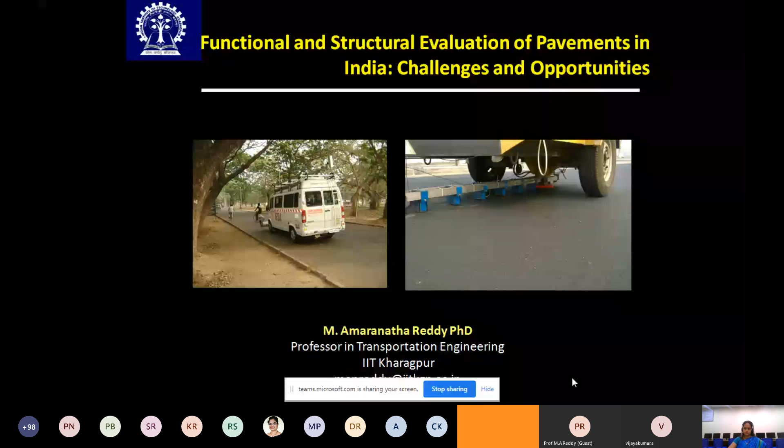My topic is on functional and structural evaluation of pavements. Let us understand what functional evaluation means. Functional means it is something to do with the top or surface layer of the pavement, that is the various characteristics or parameters. I'll come to why these are important later. The second one is structural, which means load carrying capacity or load transferring characteristics or parameters. So these two are important.

Apart from building good quality roads, the first aspect is very much demanding for the users, and the second one is for the designers or the people who maintain the infrastructure.

For civil engineering structures, be it any building or historical monuments, bridges, dams, steel structures, roads, even quality assessment of concrete or water tanks, assessment is very much essential. Once we build a building or construct a dam, we need to know the current status of that particular structure, in terms of functional and structural aspects.

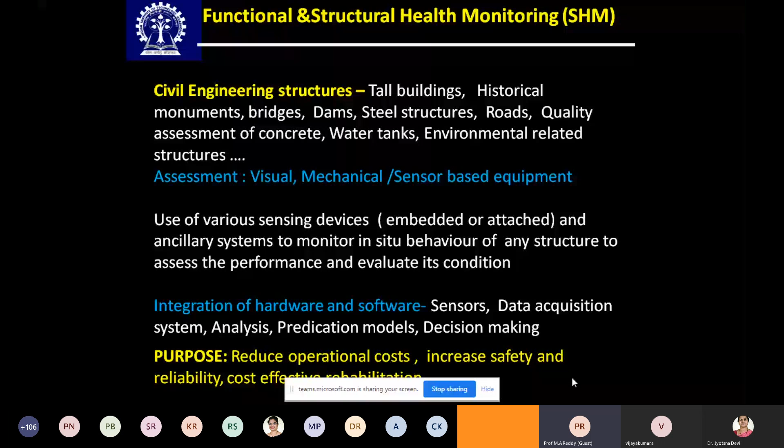Now I'll switch to my topic, which is pavements. Health monitoring of pavements is very much essential. Compared to any other structure, pavements will deteriorate very fast.

If the traffic is very high, meaning if there is overloading, and what you have projected and what is actual are different, things will deteriorate faster. Climatic conditions, rainfall, heat - all these things which you cannot avoid will also contribute to deterioration. Even a pavement that is constructed and left with no traffic on it is also going to deteriorate, only the rate of deterioration will not be as fast compared to pavements subjected to traffic. So all pavements deteriorate over time.

So you need to know the current status of these pavements. Of course, somebody can say there are visible cracks - but cracks means what kind of level of cracks? It's subjective. With these cracks, what kind of riding quality do you get, and what kind of vehicle operation cost is going to result? You can see the cracks, undoubtedly, and cracks do indicate deterioration, no doubt.

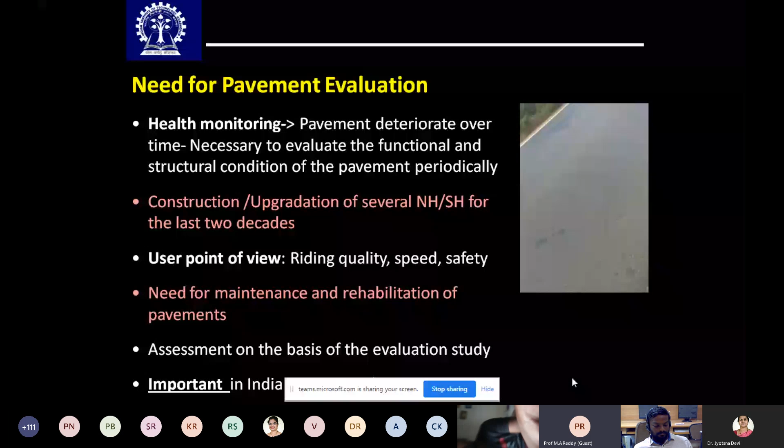For example, if I just open any NHAI website - NHAI is responsible for developing the road infrastructure in India, under the umbrella of the Ministry of Road Transport and Highways - you can see that when you want to rehabilitate the existing pavement, that means you want to go for rehabilitation, that means improving, upgradation.

They always say that you have to do this kind of things. You can see that a lot of facilities are required. I'll just come to this. So even, for example, one of the surface characteristics, undulation, is nothing but roughness. I'll come to definitions a little bit later.

See, for example, roughness has to be carried out using a network survey vehicle, which has got laser profilometers. So when I want to do the functional evaluation, roughness is one of the important parameters, so I need a network survey vehicle which has got a facility of laser profilometer.

Similarly, when I come to the strength point of view, strength characteristics of an existing pavement - since I already constructed it 5 years ago - now whether it can structurally take the load, whether it has got load carrying capacity, or whether the life of the pavement has come to an end. How to know that? For that also you need to do some kind of evaluation, which is non-destructive evaluation, NDT, using an equipment called FWD. Anyway, I'll come to this a little bit later.

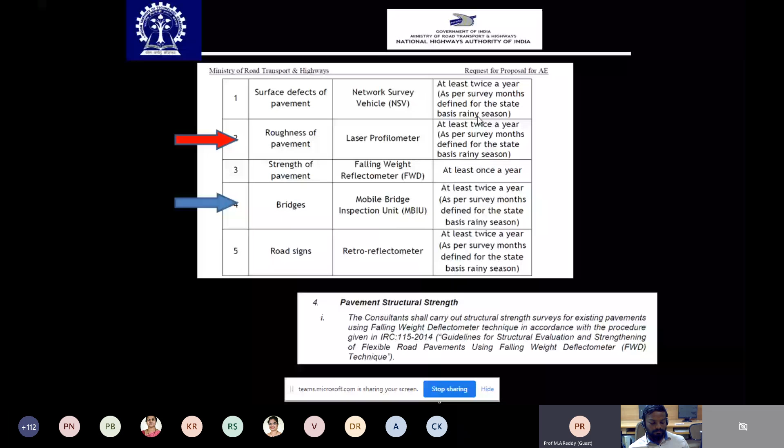Okay, so now with this background, I'll just come to this - functional. What do you mean exactly by functional performance and structural performance?

Functional performance means the ability of the pavement to provide a comfortable, safe, economical riding surface to the users. This is related to the top surface of the pavement, which we call the wearing course.

So how do you measure this functional performance? There are a lot of indices available. One is called Present Serviceability Index, PSI, and another is Present Serviceability Rating, PSR, where I can rate the pavement between 0 to 5 on a scale. I can also evaluate it by skid resistance, how much skid friction is being offered.

I can also evaluate in terms of roughness, that means the undulations of a pavement structure which is there.

So PSI and PSR are terms given by AASHO, one of the first ever road test facilities, created in the US. They constructed several pavement sections in the US back in the 1950s after the Second World War, because all the pavements were badly damaged. They wanted to understand material behavior for different loads and climatic conditions. So they constructed several sections, and a lot of studies were done. That was a landmark for the development of pavement engineering.

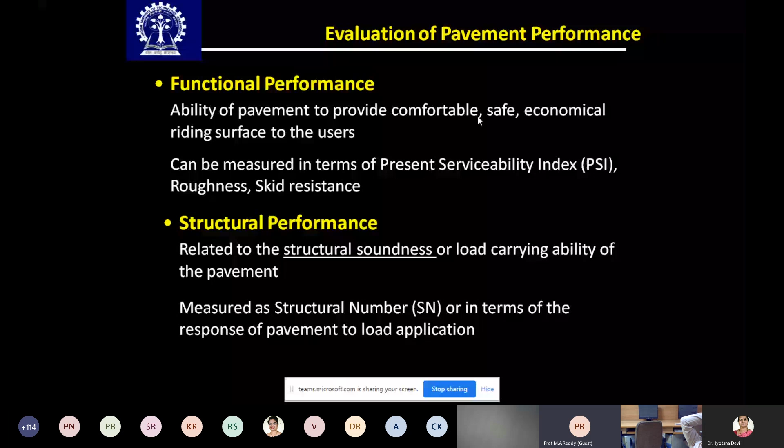Now, the most important parameter in functional aspects is roughness. Road roughness is the cumulative vertical undulations, expressed in terms of some kind of convenient index, a value that reflects the user's response. A person is going to experience this roughness.

Suppose the road has low or no roughness - of course it's impossible to construct a road without any roughness, but it will have some. Finally, the user gives his response for a given road while traveling under standard conditions, at a certain speed, since it's a function of speed also. So roughness is nothing but a measure of the variation of the surface profile of a road, and the surface defects or diseases that influence riding comfort.

So how do we measure this roughness? This is one of the very important applications in pavement engineering. Normally in India, we measure this using an equipment called the bump integrator. There are a lot of other methods too, which I can show you later. This is a vast subject that has already been developed, and I'll tell you what we can do here.

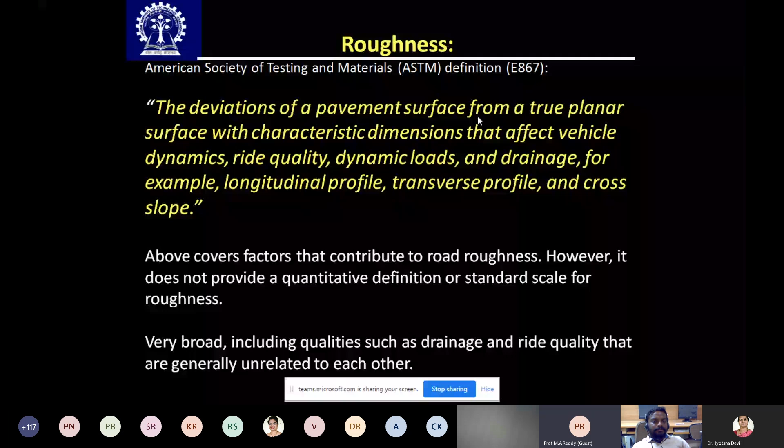Now, roughness, as I said, is to be defined over an interval of a profile. That means roughness can be per kilometer, per 100 kilometers, per 100 meters, 10 centimeters, or even 2 centimeters. So that makes a difference.

So it's nothing but a summary of deviations that occur over an interval between two points. The two points can be, as I said, 1 kilometer, 100 meters, 10 kilometers, or even 10 centimeters apart. Thereby, the roughness values I am going to give you are not unique.

Not all types of roughness are unique, because if I measure with one instrument at different periods, I may get different values. If I use different instruments, the reference points and the interval between two points will vary. I'll show you later on.

Some instruments measure roughness at 250 meter intervals. Some measure at 400 meters. Some measure at 10 centimeter intervals, like two reference points, one at 0, another at 10 centimeters, then 20 centimeters, 30 centimeters. So this will make the roughness values different.

So many of the roughness indices calculated from profiles are so strongly correlated that one is statistically sufficient. Statistics comes into picture when giving roughness values, because of these deviations. So finally the roughness indices are calculated based on some kind of simple statistical work.

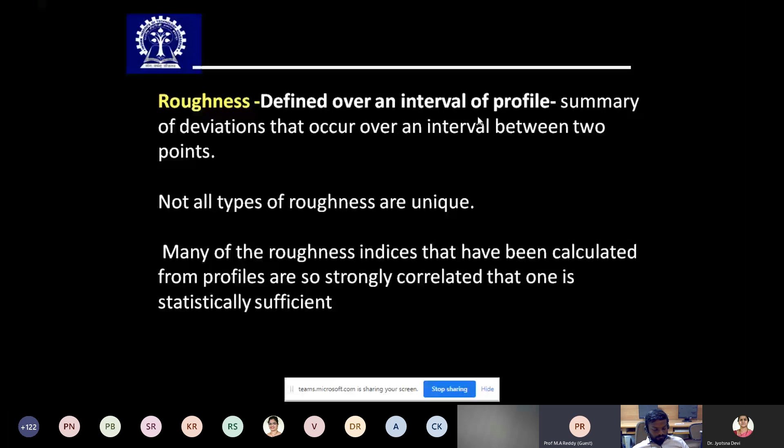Overall, roughness measuring devices are plenty. They have been classified into 4 groups: class 1, class 2, class 3, and class 4. Class 1 are precision profilers, like laser profilers, non-contact, lightweight profiling devices. I'll show you some of them.

You have hundreds of reference devices available. Each country and each university, in some cases, have developed their own roughness device. Because you can measure this roughness with reference to a true planar surface, you can develop any kind of instrument.

Finally, of course, you can convert them into one unit. For example, that's what International Roughness Index means - all the roughness equipment you have developed can be converted into IRI values. I'll come to that later.

So you have class 2, class 3, and class 4. Class 4 are just rating systems, visual inspection, rod and level survey - these are very simple things, very subjective in nature. But when you go from class 4 to class 1, class 1 is very professional, precision profilers.

We can see what is currently used in India. One instrument in class 3 is called Merlin. This is a very simple instrument that one can try even at the college level. Merlin is very cost effective, though it has its own advantages and disadvantages - a very simple, low cost roughness measuring device.

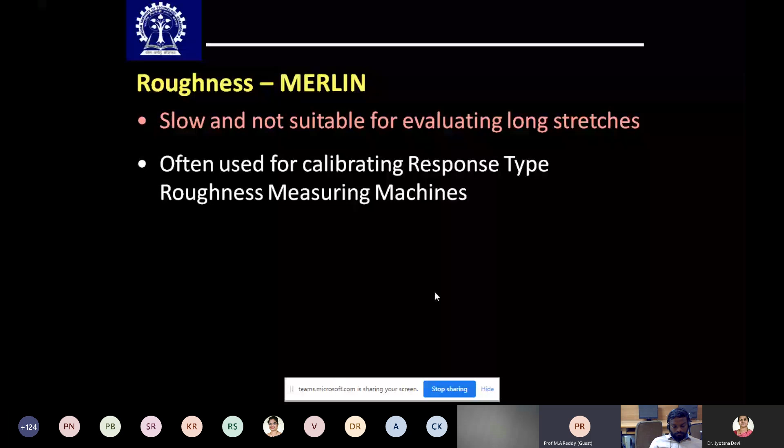They are of a type called response type. Response type devices are, for example, the roughometer.

You can see that roughometer. This Merlin can be used to calibrate some roughometers, like the TRL bump integrators. These can be calibrated using a Merlin, as per the Indian Roads Congress IRC, which is the guideline we normally follow for measuring roughness.

They also said you need to calibrate the fast moving devices, the bump integrators, with Merlin. So with the Merlin, we measure a profile. It has 2 legs, called reference points, with a distance of 1.8 meters between them, and a probe. This probe measures the profile of the pavement when I place it here.

With reference to this imaginary line joining foot 1 and foot 2, which are the reference points, we measure how much the pavement is deviating with respect to this imaginary line. That is called mid-chord deviation. This is not yet the roughness.

When I move to the next point, maybe another 1.8 meters, I'll place the probe there too, and I can find out the mid-chord deviation. Suppose there's no deviation - if the pavement profile truly lies on the imaginary line, then there is no mid-chord deviation.

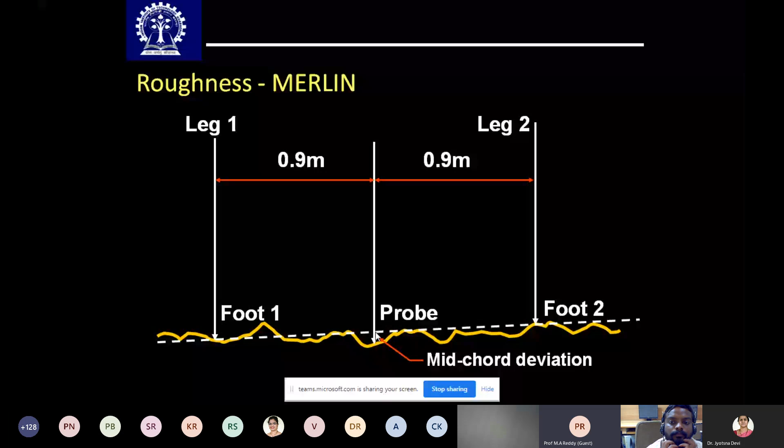This is the figure - you have the front leg, the rear leg, and a probe. This probe is connected to a moving arm with a pointer. You place a graph sheet, and the deviation is reflected here - wherever the point is shown, you mark it. You continue measuring this roughness multiple times statistically. They say you have to measure 200 points in a given pavement.

This Merlin uses a cycle tire, and one can fabricate it very easily in college - very simple, and of course a manual is available. This was developed by TRRL, the Transport and Road Research Laboratory, in the UK, a long time back, and we still use it.

You can see this is the probe - though I don't have the full figure here. This is the probe, this is the moving arm, and there is an indicator here. The indicator shows the deviation. Normally you have to take 200 points.

This 200 points - let's say this is the graph sheet. When I place this on the pavement, normally we measure as the wheels move. If I place this, and the probe is let's say here, correspondingly the indicator shows the point here. So you mark a point here.

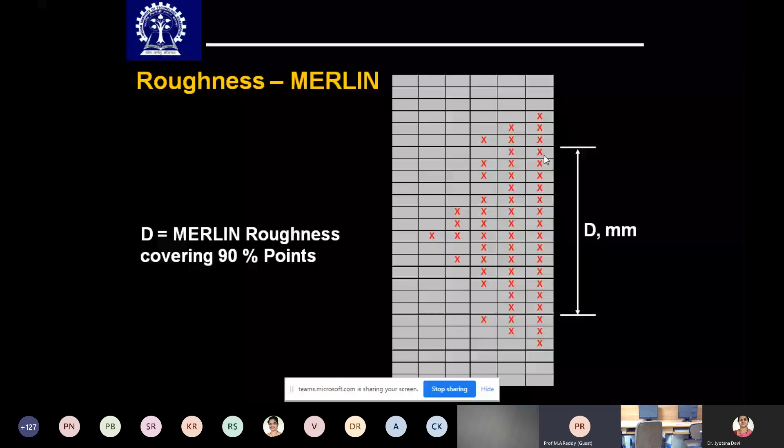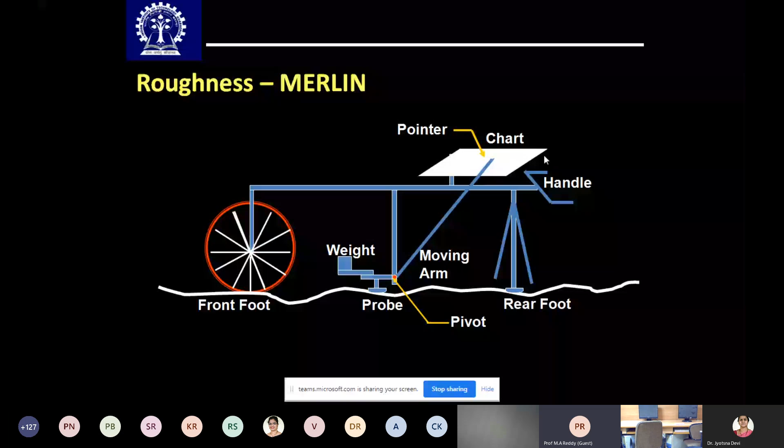If you can convert this into other indices, as I said, a lot of equipment is available. You can see in this equipment list you have Merlin. I can convert this Merlin value into a bump integrator value, and I can also convert this Merlin into IRI, that is International Roughness Index.

For that, they have given equations depending on the type of pavement surface. For example, if it is a national highway, Indian national highways have an asphaltic concrete surface, and D is the dispersion from Merlin. So if I have D, I can get a bump integrator value. That means as if I don't have bump integrator equipment, using this dispersion D measured from Merlin, I can convert into BI.

Similarly, if I want to express it in International Roughness Index value, IRI, knowing D from the dispersion of Merlin, I can calculate it from these equations, and represent the roughness in terms of IRI, where the units of IRI are meters per kilometer, whereas BI is mm per kilometer, and D is the Merlin value in mm. So calibration equations like this are available.

For different pavements, mostly for BI, because BI is another instrument, the bump integrator, that gives the roughness index from bump integrator value, a lot of work has been done, and they have given correlations between BI and Merlin, and similarly IRI and Merlin.

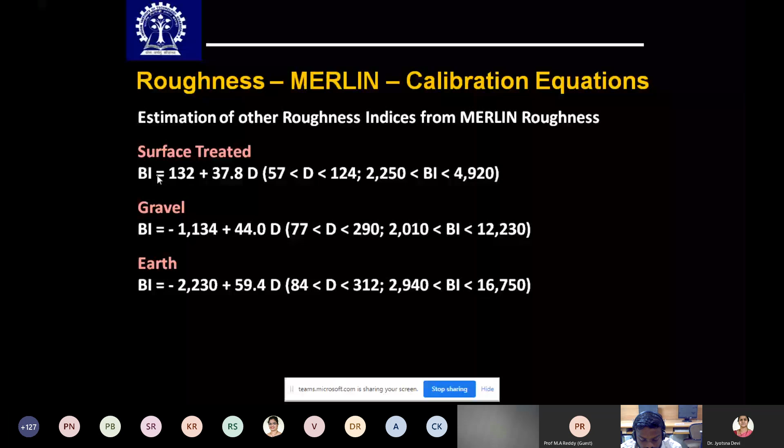The next instrument which is very much available is the fifth wheel bump integrator, which is also called a response type roughness measuring meter, RTRMM. Compared to Merlin, this is a fast moving device for measuring roughness. Normally in India we use this kind of instrument called the bump integrator, or fifth wheel bump integrator. The reason is there are four wheels required to drive and pull this at a constant speed of 32 kilometers per hour. So this is a response type device.

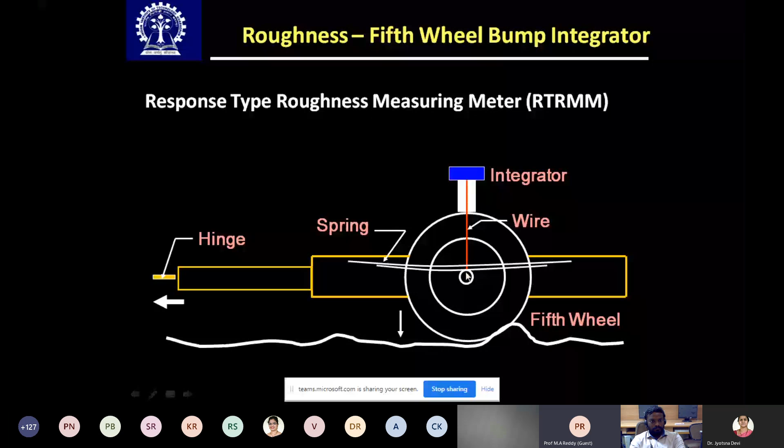What is there in it? You have a big chassis, a wheel, and an axle. What they do is mount a small device on the axle, which I'll show you in the other figures.

Whenever this wheel is driven at 32 kilometers per hour, the vertical movement of a suspension system of the roughness meter is measured and accumulated with the distance traveled. When there is a pavement undulation, like a depression, the wheel will go down, but the chassis with the entire assembly, around 900 kilos, heavy weight, will not move simultaneously because of inertia. So there is a lag.

During this lag, this is pulled down because there's a wire connected here. So when the wheel goes down, the wire also pulls, and this movement is recorded in centimeters. Whenever it goes down by 1 centimeter, there is 1 revolution of an attachment inside, and that 1 centimeter is recorded by a recorder. Suppose the undulation is 5 centimeters down, then it is pulled to 5 centimeters, and that is reflected in the counter. So taking advantage of inertia, the vertical movement is counted in multiples of a specified vertical distance, maybe 1 inch, or even 1 centimeter if required.

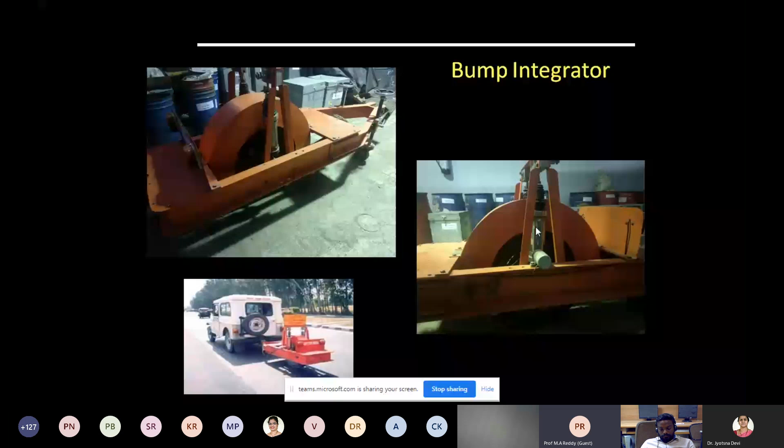So this kind of instrument requires calibration regularly. Otherwise, if it becomes very stiff, the response that's supposed to give the vertical movement may not give what it was supposed to. So you need to calibrate these bump integrators regularly, otherwise you may get a value, but it may not be the correct value. So how to calibrate that? There's a procedure available.

What you have to do is run Merlin and bump integrator on at least 10 sections. You get these 10 points and then develop a correlation based on the surface. For example, if I want to do it on a national highway, I should select 10 points on a national highway, run the bump integrator, and also run Merlin on that, so I have 10 Merlin points and 10 BI points.

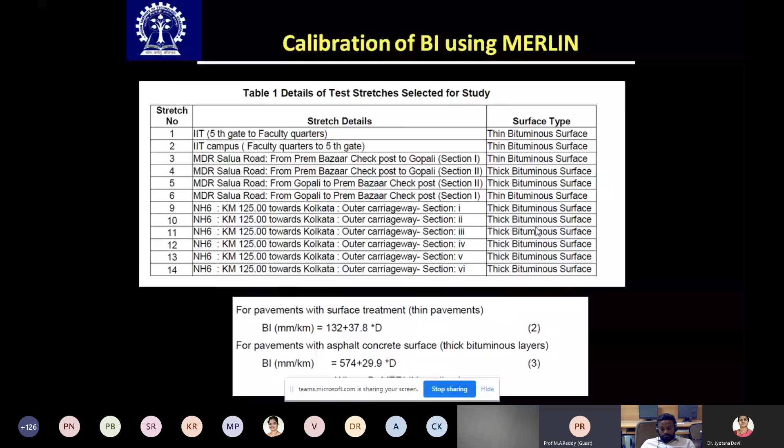If my bump integrator is correct and not deviated - the oil is in good condition, the springs are also in the condition they're supposed to be - then if I get a correlation for a national highway, I should get the same correlation as given after calibration. Suppose I have 10 points of D and 10 points of BI.

I plot a relation. If I get this kind of correlation, then I can say that it is perfectly all right.

Suppose the calibration gives a different value, so what do I have to do? I have to correct them. For example, if I substitute D as 100, my BI value should be around 3,473.

But if I'm not getting that kind of correlation, if instead of 3,473 I'm getting BI as 5,000, what does that mean? It means the bump integrator value is giving a higher value than it's supposed to.

So what do I have to do? I have to reduce all my readings by a factor. Similarly, instead of getting 3,473, if I'm getting only 2,000, it means I'm under-reporting my bump integrator value. So I need to multiply by a factor greater than 1, which I should calculate. So calibration is very essential.

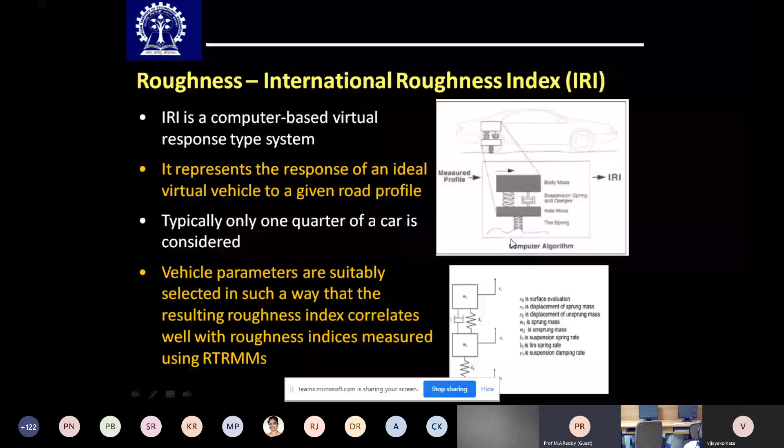What they did was called the quarter car method - a mathematical formulation. The spring and dashpot, the vehicle suspension, body of the vehicle and tire - everything is simulated through a mathematical expression. They have given a mathematical expression, and I can show you that.

So this is a way in which they try to simulate the vehicle response as if it is moving on a road at 80 kilometers per hour. They calculate this from measured data, acceleration of the mass of the vehicle, and all this information. Then they pre-process it and integrate the acceleration data using mathematical expressions. Finally, you get an IRI value. There's no instrument available for IRI directly, it's a mathematical simulation which depicts the vertical undulations or vertical response of a vehicle moving at 80 kilometers per hour.

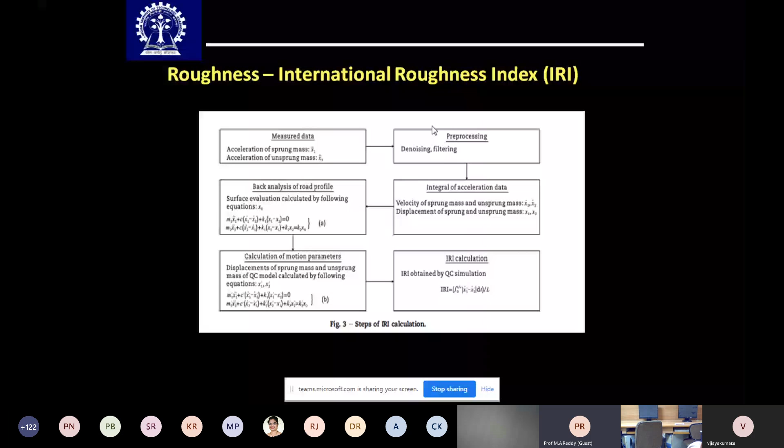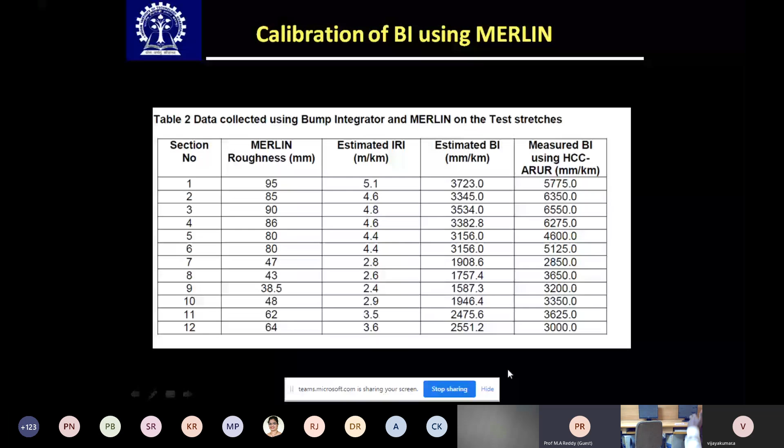With IRI, there are some correlations available. For example, if I measure roughness using Merlin, I can convert it into an IRI value. Similarly, if I measure roughness using a bump integrator, I can also convert that into IRI. So IRI is a universally accepted unit, a computer simulated mathematical model, for easy understanding. Suppose I say my roughness is 5 meters per kilometer, the international community will understand the roughness of a pavement. For example, 1 means very low roughness, 5 means very high roughness. That is what we were using until recently.

But now, with the investment being poured into Indian highways, authorities like NHAI and other organizations have started asking for even higher precision type profilometers. If you see the list of roughness measuring devices, you have class 1 laser profilers. What we have discussed till now is only class 3, the bump integrator and Merlin. But in recent times, because of advancement in technology and the importance of the project and precision required, the government is now asking for laser profilers also.

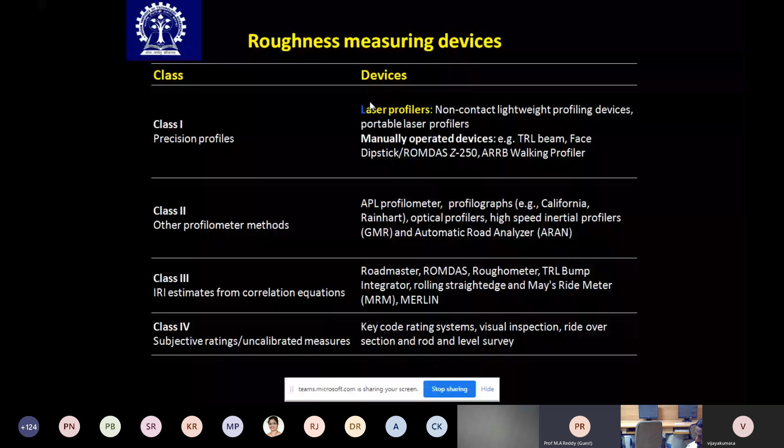So one of the laser profilers, what is this? It is nothing but a combination of a laser and accelerometer sensors to measure the road profile at highway speeds. So that means you have a vehicle with lasers and also accelerometer sensors. These accelerometer sensors, in combination with the non-contacting lasers, will give you the vertical undulations, cumulative vertical undulations.

This is also now integrated with GPS, so you can get the distances traveled. You can see this is a height sensor, and you also have an accelerometer. The height sensor picks up the height; suppose the vehicle is moving, the height is varying, so that height variation is picked up by the height sensor, and further captured through the accelerometer, and finally recorded in the computer. So this kind of device has come up in recent times, these are called laser profilers.

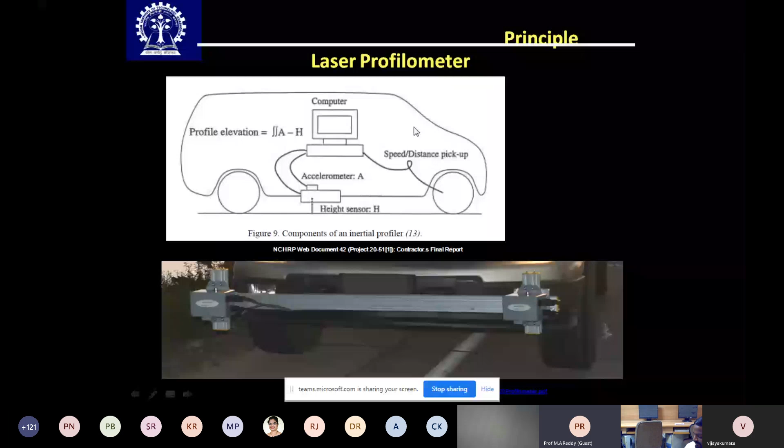One of the equipment which the Government of India is now telling us to use is the network survey vehicle. In the first slide also I showed that roughness has to be measured through a network survey vehicle. This kind of vehicle has been available in India since 2005. One such vehicle came to our campus sometime back, and we could see a demonstration of it. This is called a network survey vehicle, and now a lot of network survey vehicles are available.

Network survey, what is this? It's an instrumented vehicle with cameras all around, connected to GPS, with a lot of sensors and scanners available. It's almost like a scanner, it scans the pavement. Not only does it give the roughness, it also measures the rut depth, which is called permanent deformation. It also scans the pavement to detect other failures like potholes and cracks, everything. Since it's connected to GPS, you can know the coordinates, and the cameras also collect information about roadside inventory, like where is the building, the structure, the bridge, the tree, everything is recorded. Since it's connected to GPS, you can capture a lot of data. So now on the highways, this vehicle also has a laser profiler, which works in combination with sensors and accelerometers.

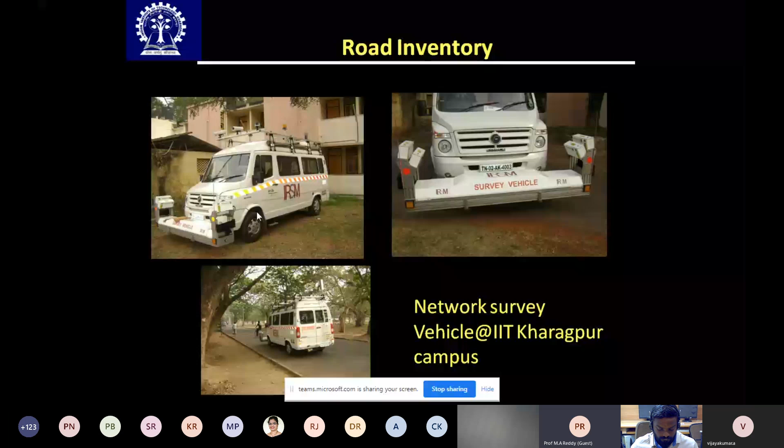Accelerometer sensors are available, laser and accelerometer sensors, so it also gives the road roughness. Today, the raw data is being collected, and there is a software called Data View, used to perform a variety of post processing. For example, if you want to find out the roughness, you can do that. If you want to find out the undulations, the permanent deformation called rutting, you can do that. If you want to know the cracks, you can measure it - crack width, everything, classification of cracks, pothole areas, everything in one go. It's only in one go now, you can record everything.

So this kind of instruments have come up in recent times. Not only have they come up, but people are using them now. Then another important...

application of this functional evaluation is development of a decision tool, which we call HDM4. HDM4 software - HDM4 is nothing but Highway Development Management tool for highways. So what it does, let me give some examples.

If you want to buy a road, suppose a road is being constructed by party X and it is being used for a few years, and party Y wants to buy it. Before buying, he should know what kind of condition that pavement is in, and when the pavement is going to deteriorate beyond a particular level, and what kind of strategy is required. Because he is going to invest millions of rupees on that, and he is going to own it for the next 30 years. He should know what is the condition and how this pavement is going to deteriorate.

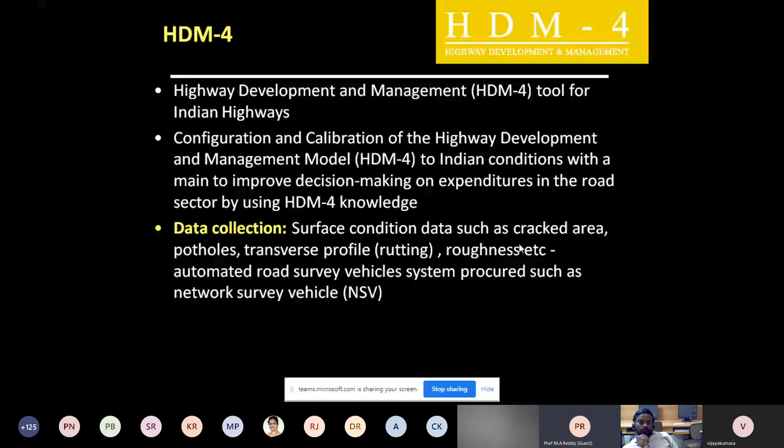So finally, I will conclude this topic. Maybe I don't know how much time I have. A lot of people have developed different profilographs. What I showed you earlier was only two profilographs - one is called Merlin, the other is, of course, the bump integrator. The third one is the network survey vehicle, which has got a laser.

But just see, people have developed several kinds of profilographs - several kinds. As I told you, each university has developed their own profilers. You can see different profilers - lightweight inertial profiler, high speed inertial profiler. Then this is something like the truss-type California profilograph. This was developed at the University of California.

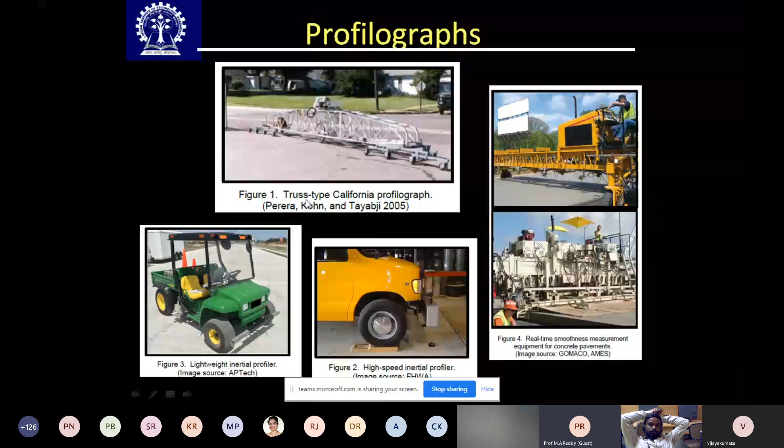Then there's a walking profiler, and the dipstick—everything measures roughness with reference to two points. It's a two-planar system with reference to these two points, and as I told you, these points can be 10 centimeters, 1 meter, 10 meters, or 20 meters apart. Over this length, they find out the elevation of the profile or road profile. A very simple walking profiler may work with maybe two wheels in the front and one wheel behind, maybe hardly 1.5 feet apart. Within this 1.5 feet, the elevation difference will be captured and recorded.

When I was searching, I found somebody trying to come out with roughness measurement based on GPS and accelerometer sensors on a bicycle, mounted using a smartphone. You can integrate a smartphone, which everybody has, on a bicycle. You just require simple accelerometers connected to GPS. A person put an accelerometer on a cycle, and while riding at a constant speed—speed has to be standardized—on a road, he could know what kind of undulations there are, and those undulations get recorded in the smartphone. This kind of work is also possible at a college level.

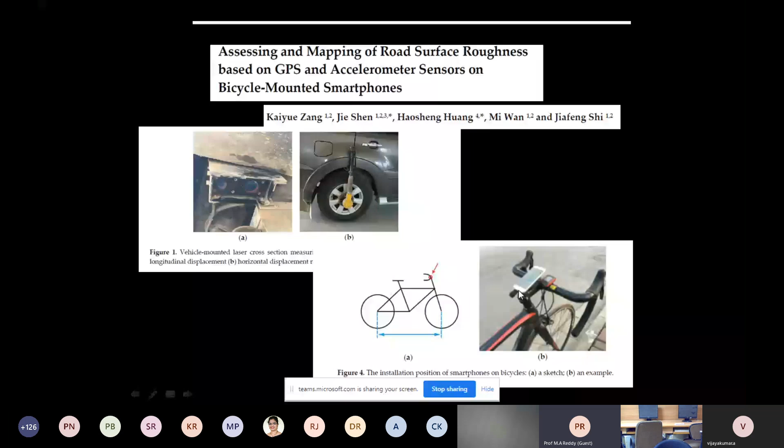He has also defined IRI through this method. Not only that, he developed other tools—since mobile phones can capture pictures and video, you can develop systems to determine how much cracking the pavement has, what is the crack width, where is the pothole, where is the road hump. Everything can be captured through a mobile device. Today this is possible, and it can be done at college level.

Suppose a sensor, when moving over a road hump, gives a different kind of signal. From that it can assess that there is a road hump here, like this. So you can try to identify potholes, humps, and roughness, all by integrating a mobile phone with simple accelerometers. This means when students of different specialties—civil, electrical, electronics, computer science—come together, they can develop this kind of module.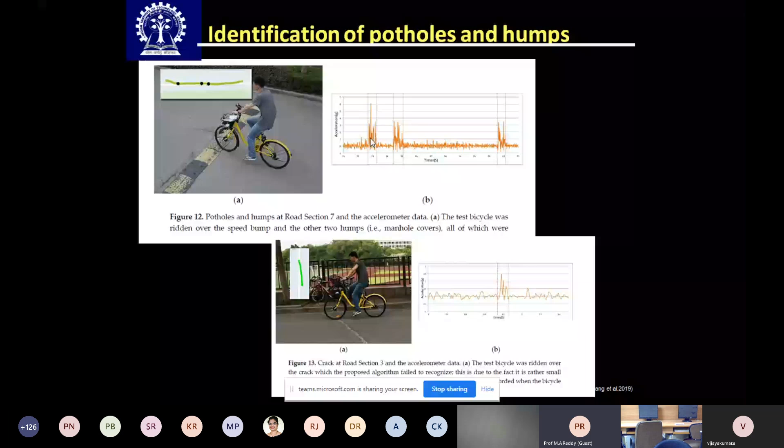Now, what are the challenges for India right now? As I said, you need to calibrate different profilographs. For example, suppose you have developed one profilograph or profilometer—you need to convert its readings by calibrating against other existing devices, and finally convert them into an IRI value. So if you've developed one equipment, you finally have to calibrate it—that's one challenge.

The second thing is you can yourself develop innovative and cost-effective profilers and use them at a regional or national level. At college level you can develop this kind of instrument, showcase it, and start using it to assess road roughness of a particular region, or even go to a national level.

The third challenge: as I showed you with HDM-4, a lot of data is required. The country needs calibration factors for road deterioration, road works, and road user effects for using HDM-4. Right now, for decision making, we are using some default values, but these default calibration factors don't belong to the Indian environment—they have been borrowed, with some assumptions. So somebody can even develop these calibration factors, though a lot of data is required to calibrate them.

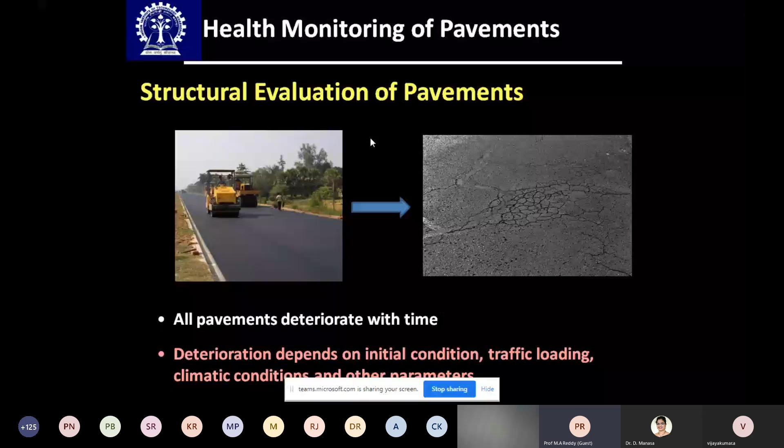The next one is structural evaluation, like the ability of the pavement to take the load. As I said, all pavements deteriorate with time, and this structural health monitoring, in parallel with functional evaluation, started from 1950 onwards. This is nothing but the ability of the pavement to take or carry loads, and it is measured through different terms. As I showed, structural number is one term, or any other parameter.

The load is applied to the pavement and the response is collected. Based on the response, you can know the structural ability of the pavement, like how much load it can carry, or how many wheel repetitions it can carry. This structural health monitoring is required to assess the structural soundness, whether the pavement is sound or not.

Once you know the pavement's health condition, you can estimate how many years it is going to survive, in terms of years, or how many wheel repetitions it can carry. So once I know that it can only take, say, one lakh repetitions, I can immediately plan for rehabilitation, like an overlay. So all these things can be done once I do a structural health monitoring.

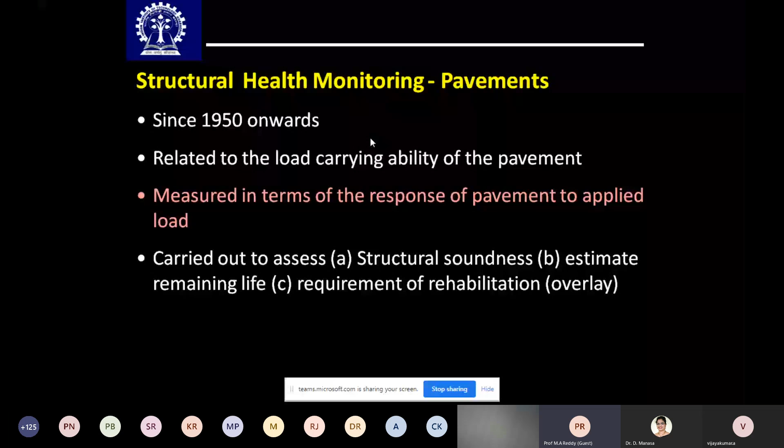So in structural health monitoring, what we use is NDT, non-destructive testing. We drop a load onto the pavement, and once I drop the load, the pavement is going to deflect. Of course, the deflection bowl depends on the characteristics of the material used. Not every pavement has to get this kind of profile, but in general, we get this kind of profile.

So you measure the deflection bowl, meaning you measure the deflections, basically rebound deflection. Once the load is applied and removed, you measure how much it has rebounded. These deflections are different ordinates that you measure. When I apply load, the pavement doesn't just deflect; there are also a lot of stresses which develop, resulting in strains. You can measure any one of them, but measuring stresses and strains is very difficult.

Suppose I want to measure deflection at the interface between two layers—that's very difficult; I'd have to embed some instruments to do that. So out of all this, it is easiest to measure the surface deflection, how much it has rebounded. People have used this data to find the load carrying capacity and a lot of information about the pavement structure, for health monitoring. The health of a pavement can be assessed using this rebound surface deflection.

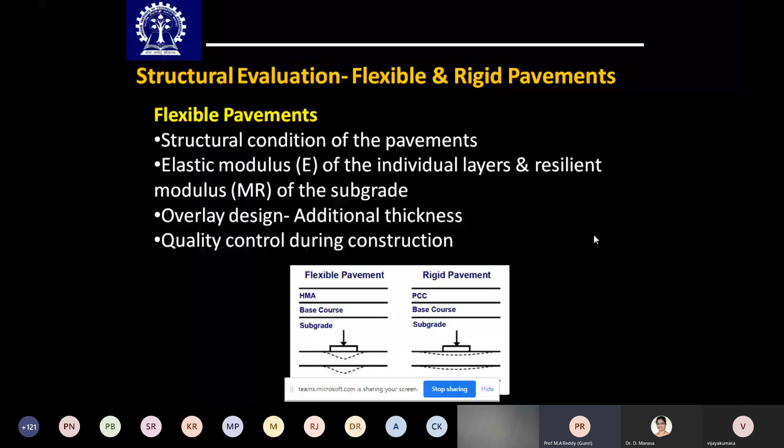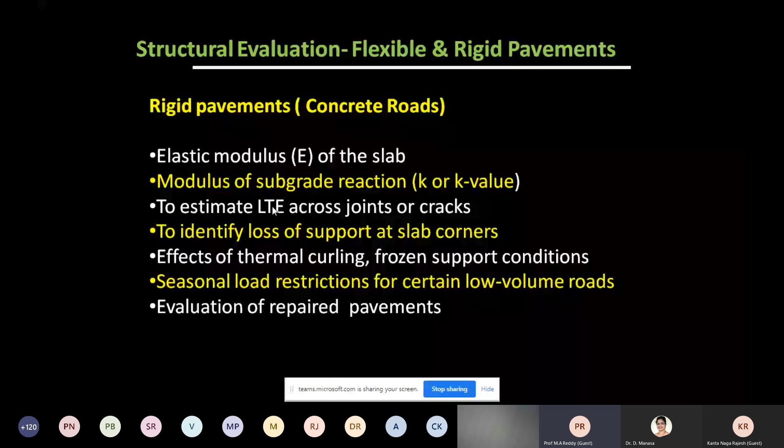All these things can be found out by conducting structural health monitoring for concrete pavements. This developed a lot from 1950 to 2010, as people started developing equipment. They are static load based, vibratory load based, impulse based, and today we have rolling. So there are 4 stages, static to rolling, and where we are standing today is we recently came to this level.

Of course, our country has not seen this kind of instrumentation. We only had static based NDT. Then we moved to impulse based NDT very few years back, almost 3 to 4 years back, and we are yet to move to the other stage.

So what are these? We started with static, where the load is applied statically. Then we moved to impulse, and we have to go to the next level called rolling, where the wheel is moving and we capture how the deflections respond.

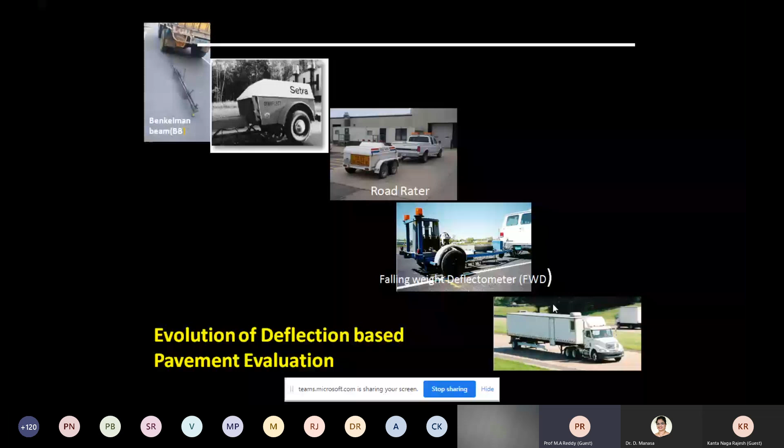Based on this first method, starting from 1950, India also adapted this. There's a guideline developed called Indian Roads Congress 81-1997, where we have a standard procedure to find out the overlay thickness required.

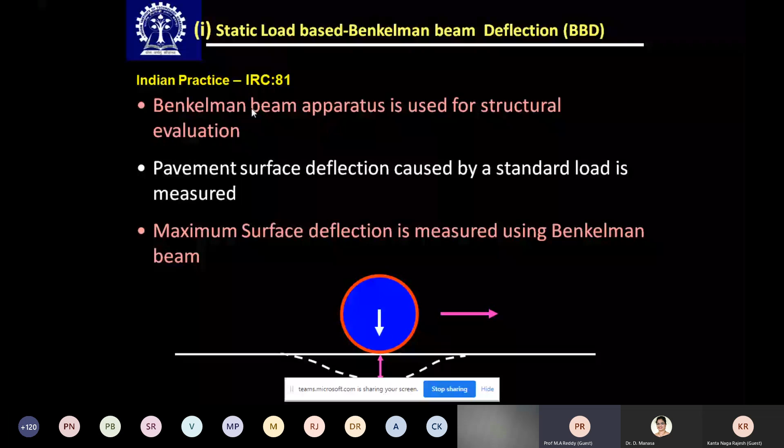So till 2015, 2016, we were only using this kind of method where we have a long beam. There's a method called CGRA method, where we have a long beam and we try to measure only one deflection, the rebound deflection, when the load is removed. So I'll show you a photograph.

So I have a loaded truck here with a standard load of 8 tons on the rear axle. I insert this beam, and then I follow a standard procedure.

So what happens is, when the load is applied, the beam is under the deflected shape because the pavement deflects slightly. When the load is removed, the pavement is going to rebound, and that rebound deflection is measured through a dial gauge.

This is a dial gauge, and there is a standard procedure available for this. You require a simple device called Benkelman beam. Benkelman was the person who developed this, and there is a standard procedure available.

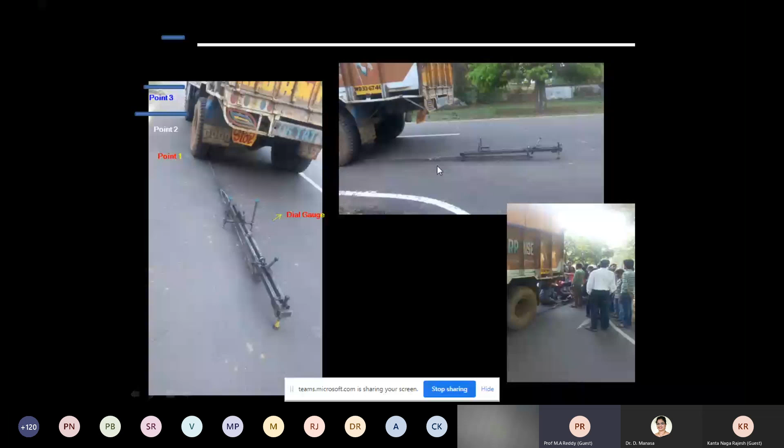With this standard procedure, we have a parameter called characteristic deflection. From this characteristic deflection, I measure what overlay is required. This is a very standard procedure which was there.

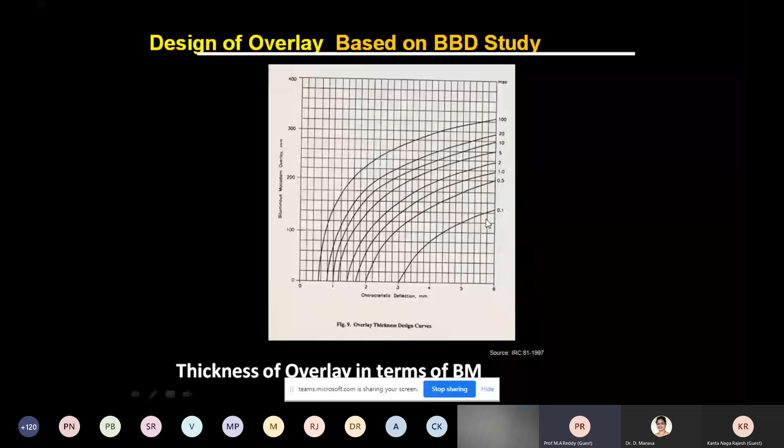But the problem with this is that two pavements, because I am only measuring this rebound deflection, two pavements which have the same maximum ordinate, the same maximum rebound deflection, may have different profiles.

So if you have two different profiles like this, the structural condition of these pavements are entirely different. So this method will not be able to capture the real condition of the pavement with just one deflection value. Moreover, the load is applied statically.

Actually, in pavement engineering or civil engineering generally, when you are trying to measure some response, you have to apply loads in a realistic sense. So in a pavement, what is realistic? Unless it's a traffic control device with a signal, all vehicles are moving at 60, 80, or 100 kilometers per hour.

So whatever information you want to capture, you have to capture it when the load is moving, when the vehicle is moving, not when the vehicle is stopped and some load is applied gradually or as an impulse load. That is not the way. The load should be moving, not at low speeds, but at speeds like 80 or 60 kilometers per hour.

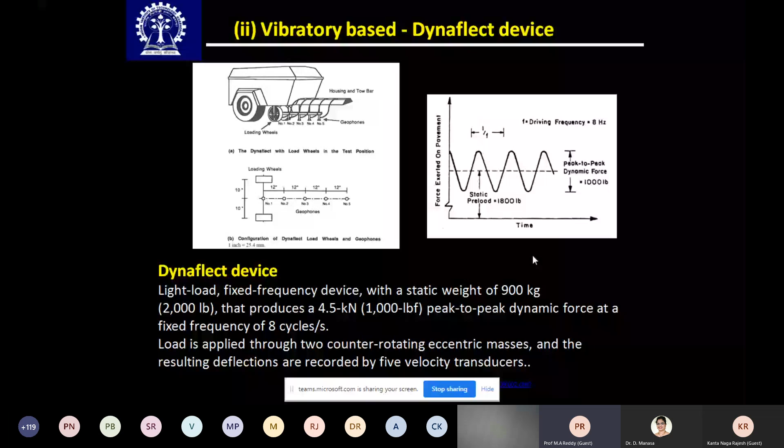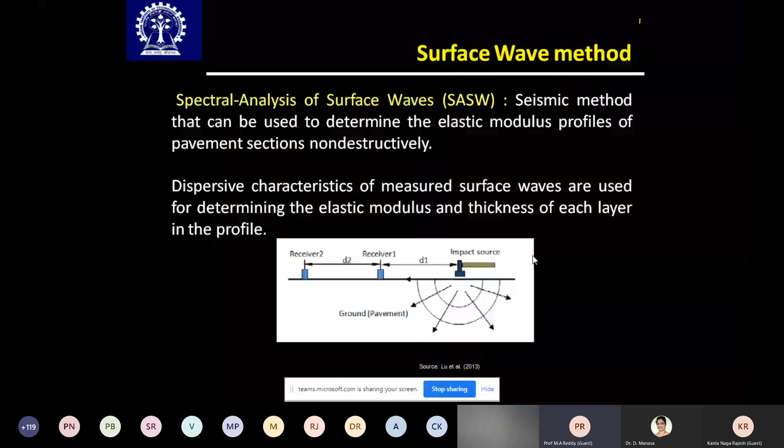So all these methods did not last for a long time in terms of NDT.

Then come the third and most important devices called impulse based load, after this vibratory load. There are a few instruments called lightweight deflectometer, LWD. Then falling weight deflectometer, one of the most popularly used for structural evaluation of pavements all over the world, not only in India, everywhere. And in the same family we have fast moving FWD, same as that. For airports we have another device working on the same principle but with higher capacity, called heavyweight deflectometer. So lightweight, falling weight, heavyweight - all these are impulse based.

Now what is the use of this? The first one is called lightweight deflectometer, a very simple device, useful only for measuring NDT, non-destructive testing. From this data, you have a single hammer load dropped, and you have a sensor here - a load cell, and one sensor which measures the rebound deflection. This is only useful for finding out the characteristics of a single layer of a pavement, or maximum a thin asphalt layer. For example, you have one layer, maybe subgrade, and only a very thin asphalt layer - only for that this is useful.

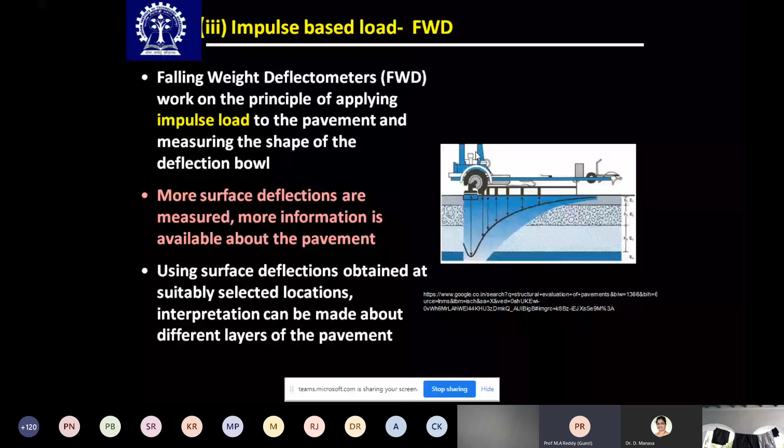So you'll be measuring deflections at several radial distances and doing that - a lot of applications. And one of the important things in this FWD is also calibration.

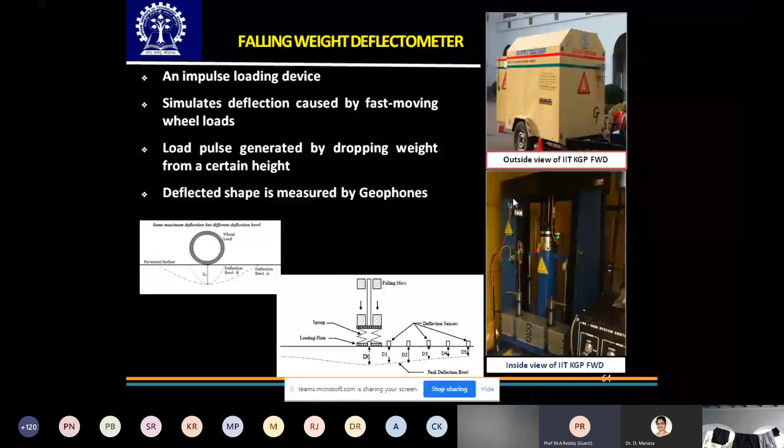Indian experience with FWD - very few institutions have had these FWDs, way back from 1990 onwards. Kharagpur also had this opportunity to develop several FWDs, and what I'm showing is the one which I've developed, which we are using currently.

In recent times, because of the requirement from Government of India that structural evaluation has to be done not by BBD, Benkelman beam deflection, but with the FWD, a lot of consultants and some academic institutions have procured these FWDs.

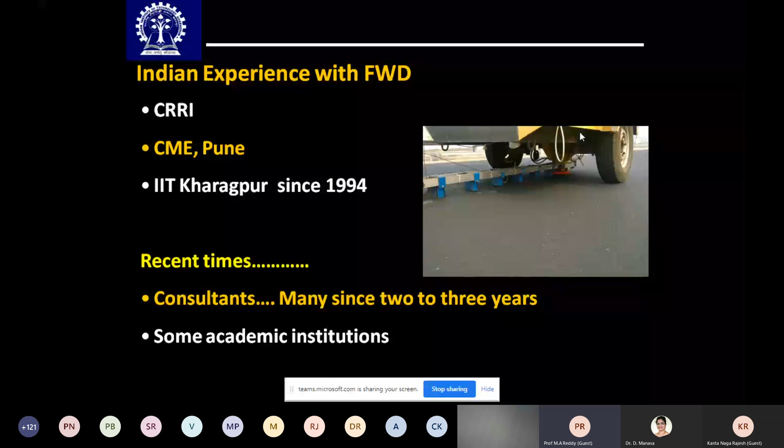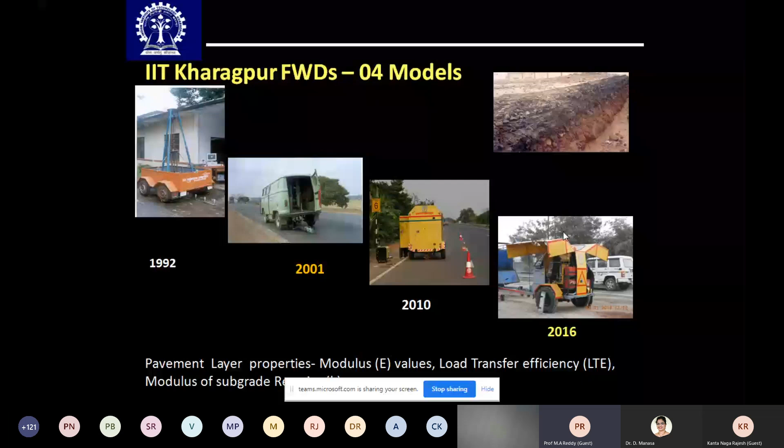IIT Kharagpur has developed 4 FWDs on our own: a manual version way back in 1992, then a semi-automated one, and 2 automated versions. We transferred the technology for these 2 to one firm, which has developed and is marketing them. A lot of FWDs are also available around the world, like Dynatest, KUAB, Phoenix and other companies, with Dynatest being the leader. A lot of imported FWDs are also available in India to measure these things.

So this is what it does. You can see there's a loading plate, a load, and sensors that capture the rebound deflection. And you have a laptop. Today you can also discuss about this remotely, capturing this information by sitting in the office. Otherwise, this instrument has to go to the field undoubtedly, and then you can capture the data.

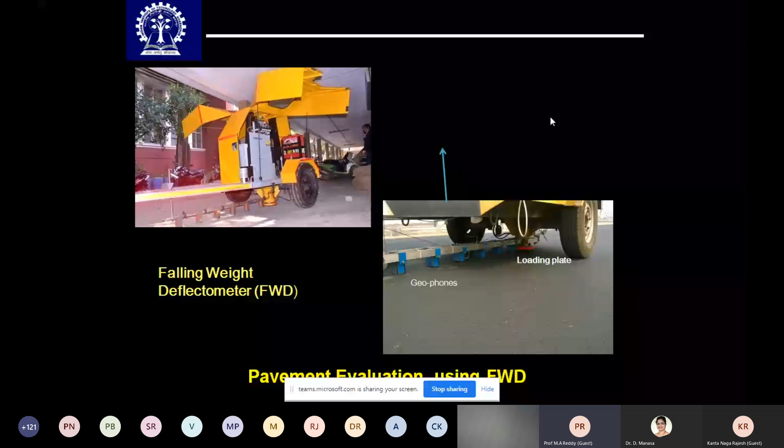We have used this extensively for our research work here. For example, this is a concrete road. We have developed some short panel concrete pavements for Indian roads, which is going to come maybe next year in Indian highways. These are very small in-situ panels, where the thickness of the concrete pavement is reduced by 20% compared to conventional concrete pavements.

Now, load transfer at this joint - if I want to find out what load is being transferred from this slab to that slab, the FWD is one device where we find out load transfer efficiency, called LTE, through this falling weight deflectometer.

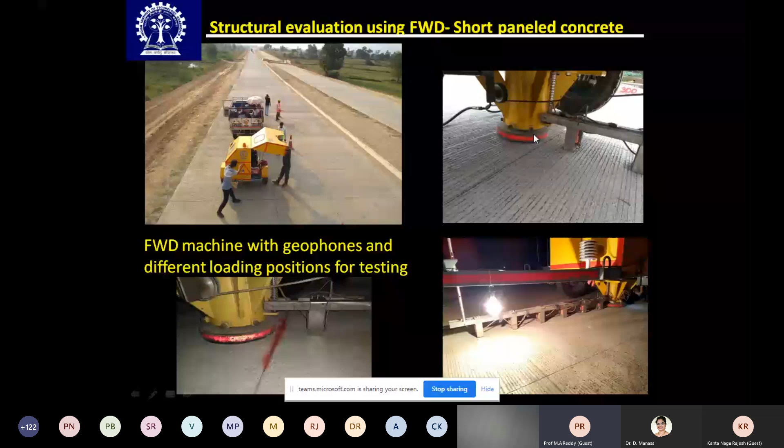These are short panels that we have constructed on NH33. Almost 3 kilometers of such roads were constructed about 3 years back, and these have been successfully used, with a lot of benefits available.

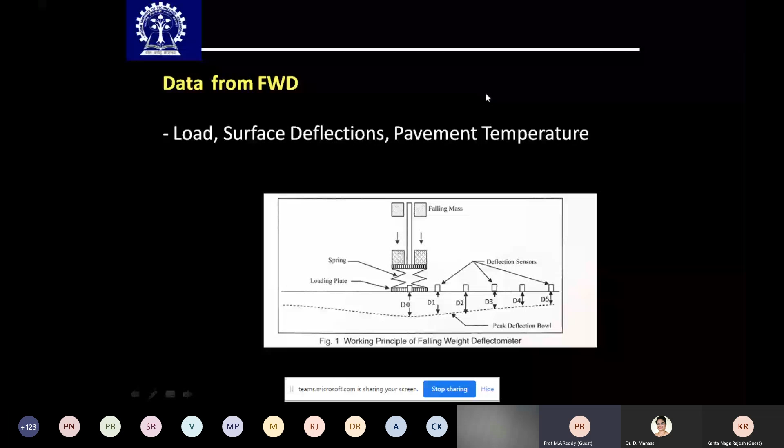So what we do is drop a load and find out the surface deflection. We also measure the pavement temperature during this FWD testing. There's a procedure available for how to do this FWD testing - the IRC has brought this down, though IIT Kharagpur drafted this code. This is not a code, it's a guideline, called Guideline for Structural Evaluation, that is strengthening of flexible road pavements using falling weight deflectometer.

So there's a procedure given for how to collect data. I'm not going to discuss how to collect the surface data because I'm running out of time, but guidelines are available, IRC 115/2014.

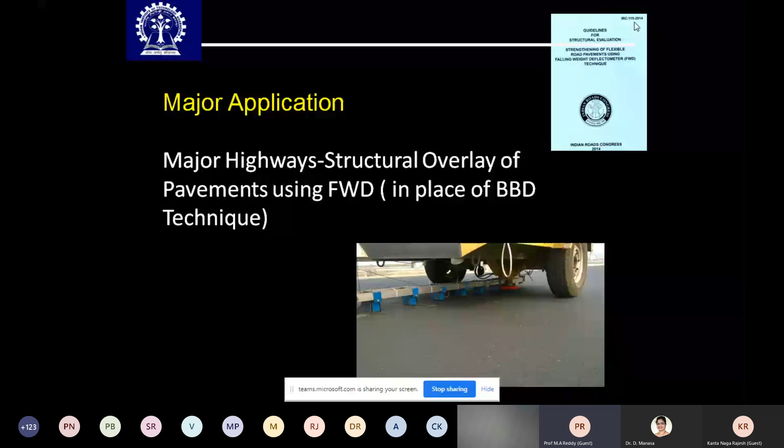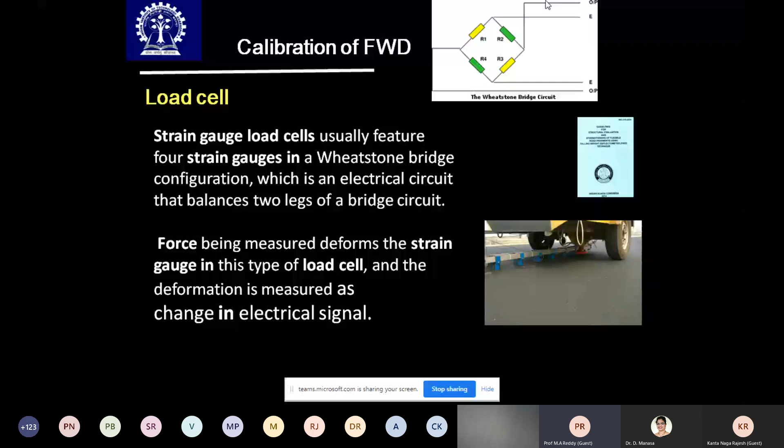So how to measure? A very important thing is calibration, because this also has sensors - we call them geophones - and a load cell. We need to calibrate them, so a calibration protocol has to be developed. In India, we don't have a protocol; Kharagpur has given some protocol, but this has to be thoroughly examined, and there's always scope for providing good calibration procedures to calibrate the responses like geophones and load cells.

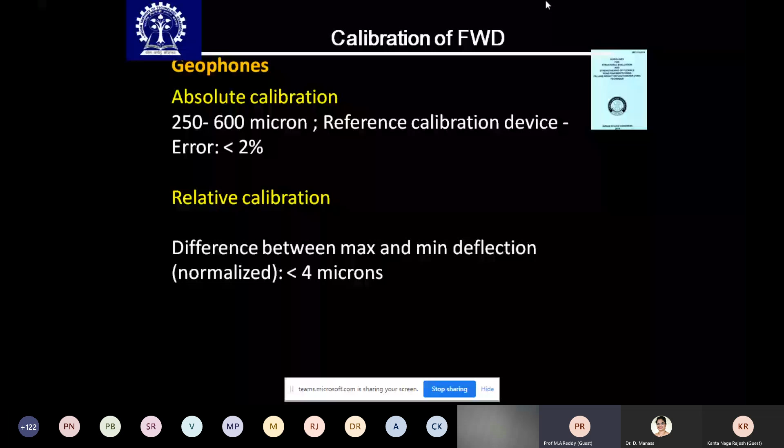And this is the method that we have used, a procedure where we can find out deflection studies on a national highway. This code is elaborate, and this specification is elaborate.

One of the inputs required, in addition to the rebound deflection, is the layer thickness of the existing pavement, because this is done on an existing pavement. The layer thickness can be found out by coring on the shoulder portion, or if you have historical data correctly, you can use that. Otherwise, coring is one option, but if you want to avoid coring, which is elaborate, time consuming, and causes destruction to the pavement, you can use another method called GPR, ground penetrating radar survey.

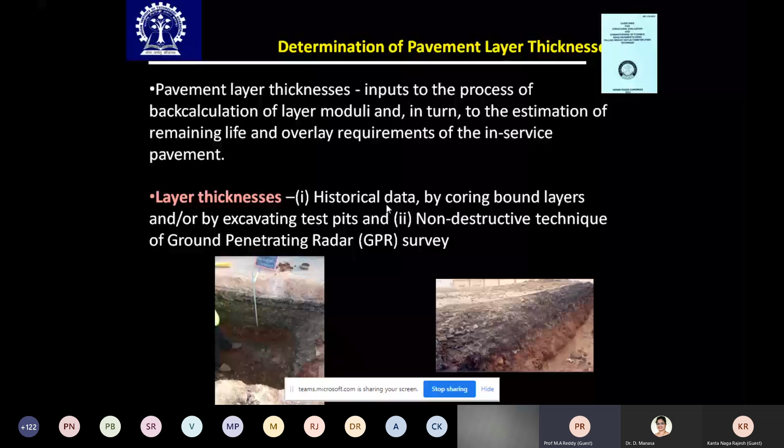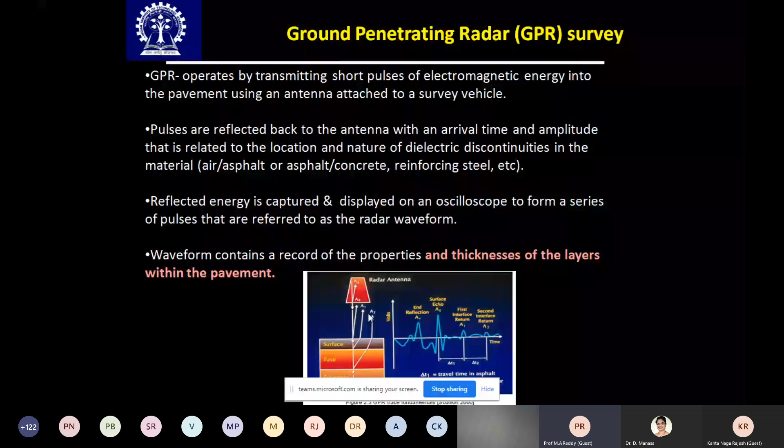This is a GPR. You can run a GPR, which has several applications - with GPR you can know the layer thicknesses also. So from layer thicknesses, deflection, and temperature, we analyze this data, because the ultimate aim for flexible pavements or any other concrete pavements is also to find out the elastic modulus of all the layers.

So you can do this by a procedure called back calculation. This is a software basically, and it's a process of selection and adjustment of the layer moduli using any technique. It can be an optimization technique, a closed form, data search, or iteration based, so that the deflection computed and measured exactly match.

There are different tools you can use: ANN based, artificial neural networks, or genetic algorithm, or a blend of ANN and GA, or you can do regression analysis, etc. Kharagpur has developed one model long back, which is GA based, and that is what we are using.

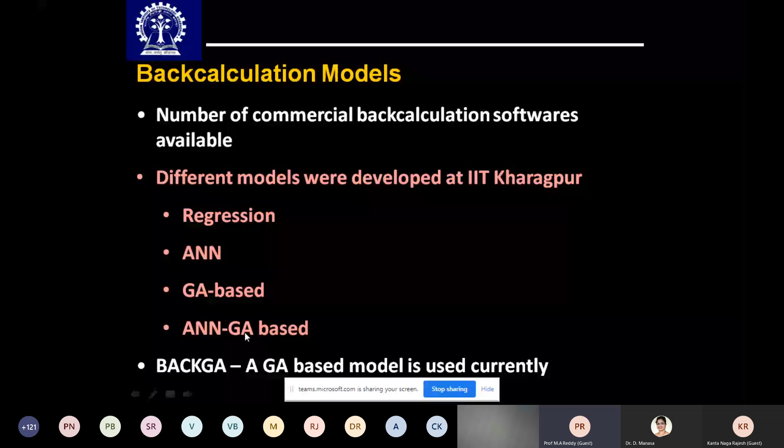For this software, a lot of data is required: measured surface deflections, radial distances, thicknesses, and Poisson ratio values, which you can assume, and the temperature. Based on that, you can back calculate the layer moduli.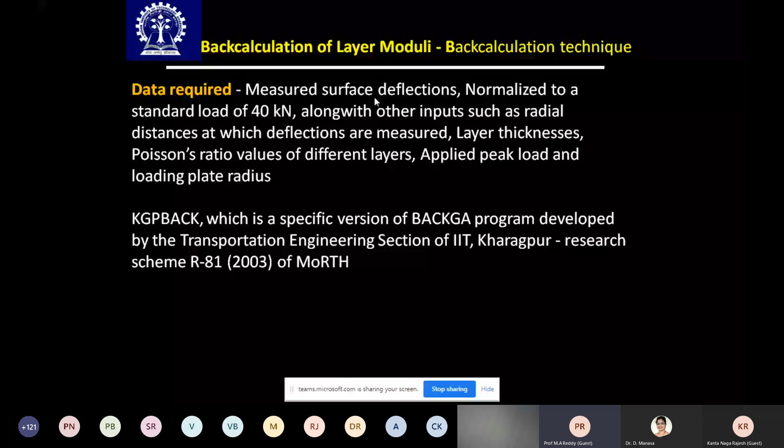For example, if you have 4 layers, how does back calculation work? This is a flow chart. A lot of back calculation programs are available. Not only India has this, but a lot of universities in the US have developed their own back calculation programs, and with this you can find out the layer moduli.

For example, if there are 3 layers or 4 layers, you can find out E1, E2, E3, E4 of all the layers. Once I know E1, E2, E3, E4 of the layers, I can substitute these elastic moduli in the pavement analysis program and find out the strains which I have.

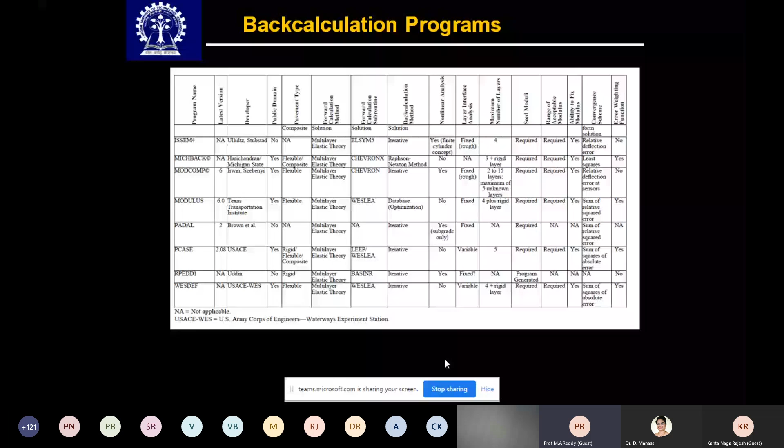I have a back calculated moduli. How am I going to use it? So I have a design traffic. Based on the layer moduli and design traffic...

What I can do is propose an overlay. How to do that? There is a procedure given here. So let's say this is a given pavement.

Now I know E1, E2, E3, the modulus which I back calculated from the deflections, and Mu1 Poisson ratio, which I can always assign a value. I know the load, I know the thickness of the existing pavement. From this I have a forward calculation program, an analysis program called IIT PAVE, which computes the stresses, strains, and deflections in a pavement system for an applied load.

From that, I can find out two strain values: at the bottom of the asphalt concrete and top of the subgrade. Using these values, I have performance equations based on these two strains, so I can know what is the life of the pavement in rutting and fatigue modes.

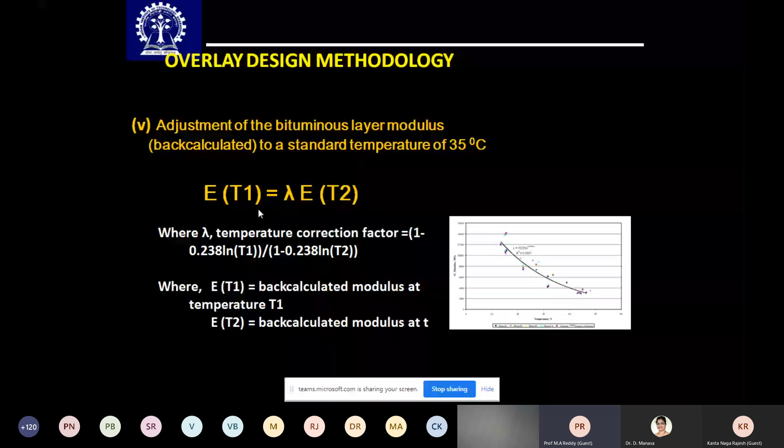This life, NF and NR, should be more than the design traffic. For example, suppose I want to extend the life of this pavement for the next 10 years. During those 10 years, how much traffic is likely to apply? I have to estimate that based on cumulative standard axle loads. Let's say it's 100 MSA, 100 million standard axles.

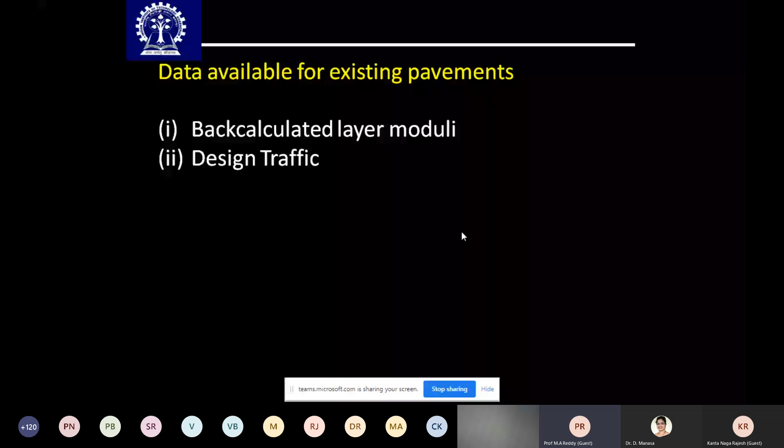So if I substitute the strains computed from this analysis, which I got because of back calculation from the deflection I measured, E1, E2, E3, E4, and if I get both of them more than 100, I say I don't require any overlay. Of course, if the pavement is distressed but not because of structural failure, maybe from functional failure, you can have a minimum thickness, maybe 40mm or something you can put.

But if the life in rutting and fatigue is less than the desirable value, that is 100 MSA, then what I have to do is place another layer over this, called an overlay. I have to provide another overlay whose thickness I call H0, which I have not shown you here.

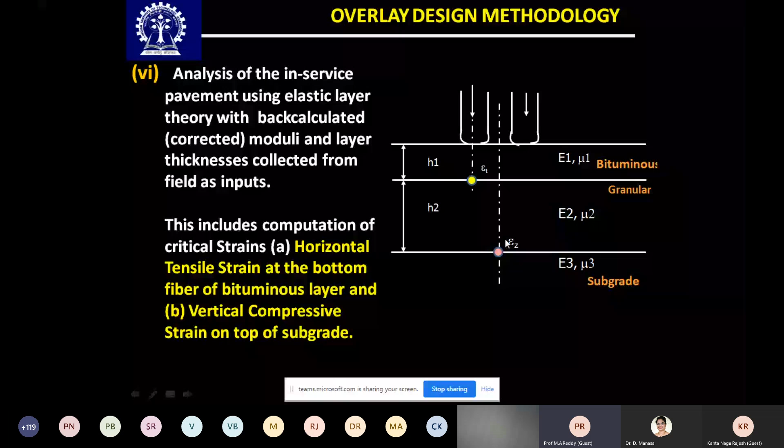I have to use H0 and reanalyze. If I am strengthening this pavement with H0 thickness, my strains are going to reduce. Again I recalculate the strains and substitute these lower values, because adding another layer gives lower strains. Because of lower strains, my life is going to enhance. So I have to do this repetitively till the life in rutting and fatigue is more than 100 MSA. If I can do that, then that thickness is the overlay thickness required.

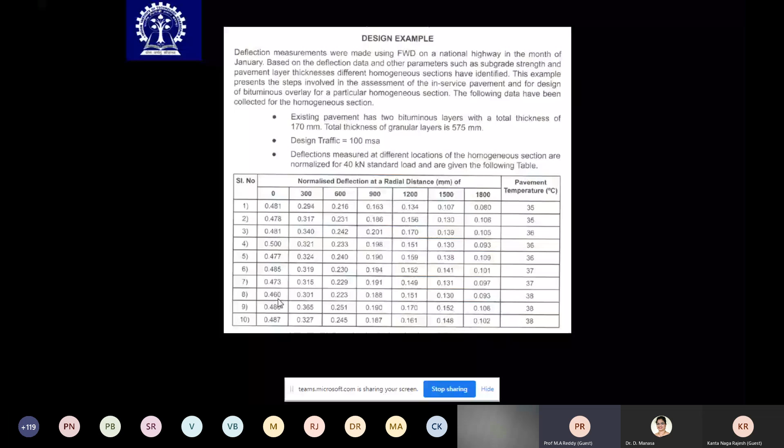So this is what is currently being used in India. FWD is mandatory today to find out the requirements for overlay. There are other applications from a research point of view. Only thing is, you should have this kind of instrument.

With concrete pavements, because they curl up due to temperature difference, you can measure the curling by embedding these kinds of devices. During that time, you can also do the FWD testing, because the slab is curled up or curled down. At that time you apply the load and see what the response of the deflections is. That is more realistic. So that is one application.

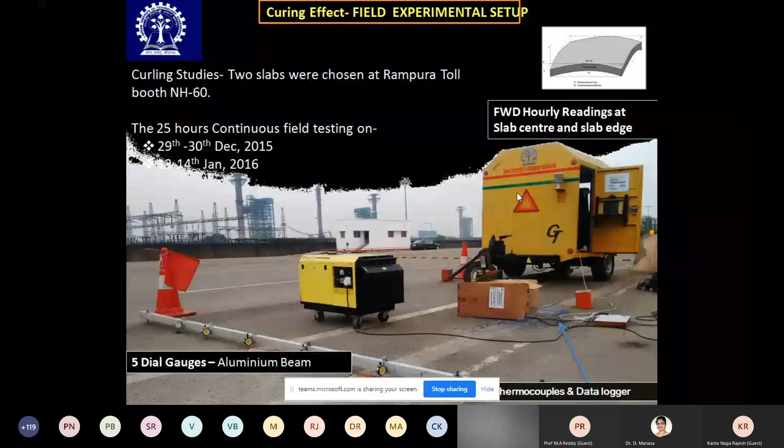Second application, as I told you, is load transfer efficiency. We have done this in a conventional concrete pavement between two slabs, to see how much load is being transferred. I can also determine the modulus of subgrade reaction, the K value, which is one of the inputs for pavement design. So that I can also do.

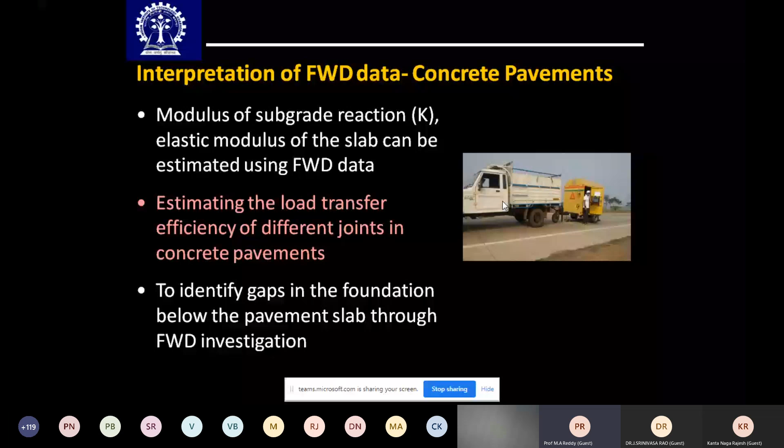But for all these things, the only thing is you require this kind of device. This is what currently it is being done. So in the future, of course, the rolling wheel deflectometer is also coming up. What is that rolling wheel deflectometer?

The wheel is moving at 60 to 80 kilometers per hour, and there is a laser beam here. A standard load of 8 tons is applied, and when the load is moving at 88 kilometers per hour, the laser beams capture the deflection. This is currently at an experimental stage. This means it is more realistic, since the wheel is moving and rebound deflections are being captured because of the application of load. This is now under experimentation.

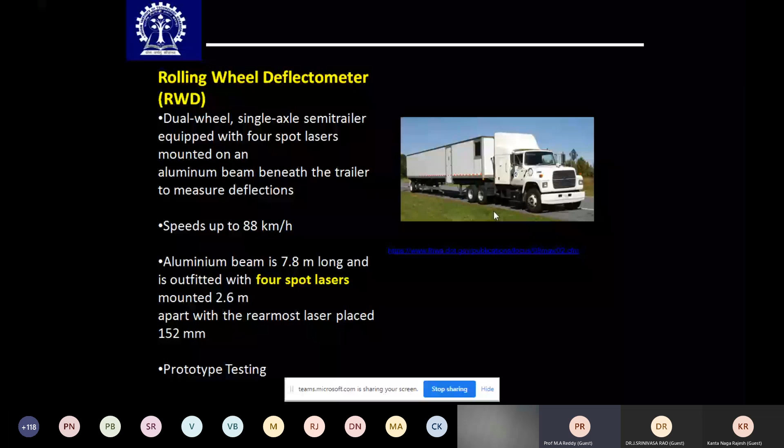Some institutions are working on this, and maybe in the future these kinds of instruments are going to come. There's also one more device, I think in Germany, called the traffic speed deflectometer. Same principle, more or less, where they use velocity. They measure the wave velocity when the wheel is moving, and from that velocity they calculate the deflections, again using a moving laser beam. This is called traffic speed deflectometer, based on the velocity approach. This is another device that is under the experimental stage.

There is one more device, a multifunctional instrument. Why have functional evaluation separately and structural evaluation separately? Everything is integrated in this instrument. You have road unevenness, which is roughness. Now you have a laser, and the rolling wheel does the measurement. That means this is for structural evaluation.

You have texture, which means skid resistance can also be measured. In the front you have another scanner which does road scanning, to detect cracks, potholes, and rutting. So potholes and rutting come from these laser sensors, unevenness from another, and a rolling wheel with lasers does the rebound deflection measurement, and there's a gripper for texture and skid resistance.

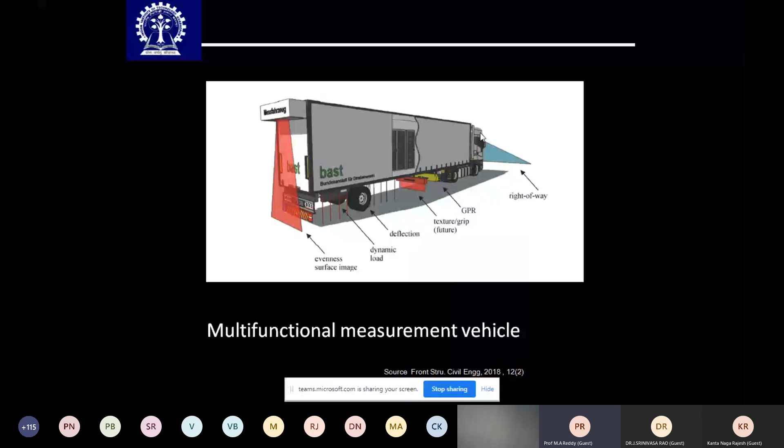Now, the challenges currently in India are: since we have switched from Benkelman beam to FWD, as I told you, from 2015-16 onwards we migrated from BBD to FWD, today BBD is not applicable for strengthening of flexible pavements in India. So there is a lot of demand, with people asking why we can't develop a correlation between BBD and FWD.

That is one, so that can be done. But a lot of experimental data has to be collected before you give a correlation.

Then seasonal corrections. In the FWD, we have given some seasonal correction, like if you do the FWD in winter, what would be the modulus values, because you have to do FWD in a post-monsoon season basically, or if you have got seasonal factors also, that also can be okay. But we have done based on some limited data.

So the seasonal correction factors can be done for deflections. Backcalculation analysis, the software which we told BACKGA, right now we have incorporated for a 3-layer system. It has to be 4-layer, and there are a lot of issues also in that.

If there is a rock in between, suppose you have a very strong layer and after that a weak layer, this program cannot detect that. This program only gives the back calculation if values are going to decrease from top to bottom, but if in between somewhere there is a rigid layer, suppose a concrete layer is there, it cannot perform that. So that kind of thing also has to be done.

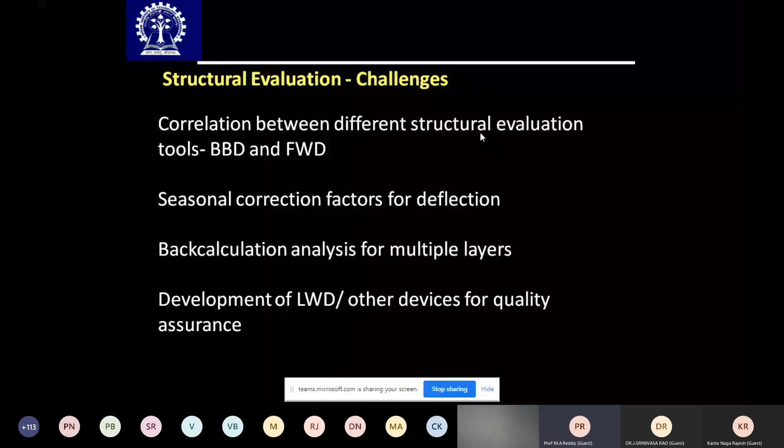So anyone, please, any doubts? Any questions? Yeah, unmute yourself and you can ask the question. Good morning, sir. Good morning.

Sir, can we able to integrate this data with remote sensing and GIS, sir? Which data?

Whatever information we are getting through the dynamic movement. Always possible, yeah, always GIS, GPS. Yes, you can always do that.

So can we have a constant look over the routes? I mean, which data are you telling, which one are you talking about? All the structural evaluation, the deflections, cracking, all the functional parameters and the structural parameters, can they be linked directly to the GIS and remote sensing? That is the point.

But how to do that? I mean, you have to collect using some devices. Then whatever application you want to do, you can always do that. But only thing is, you have to first collect this information through some devices. That can be possible. Nowadays, some sensors are kept near the bridges, sir.

That is bridge monitoring. Yes, that is there, that is there. Can be able to see. See, even here also, if you want to do pavement monitoring, you can do that.